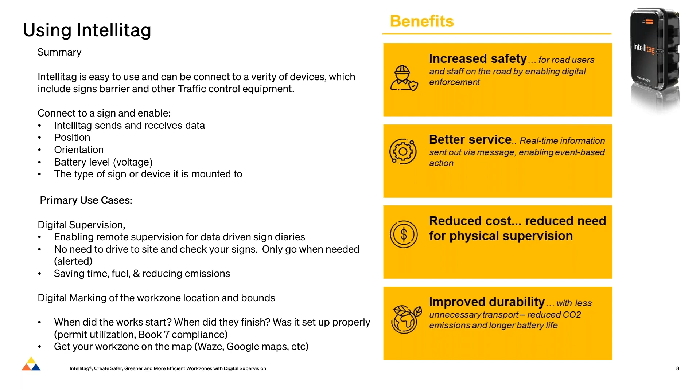How does Intellitag work? We install the Intellitag on a device via screw, bolt, or banding. Once it's attached to the device, we open the deployment app and scan the QR code on the back of the device. This gives us a menu showing how the device is doing, battery, expected life, and the last work zone it was on. Then we can pick what sign face we want to display on the Intellitag and what geozone or site we want to use.

Once we've done that, the sign will show up on the map. The whole process is designed to be easy and very quick.

Now that the device is set up, it'll appear on the map back on the web portal, and we can get alerts via SMS and email when the sign's been moved, knocked over, or even stolen.

How often does Intellitag check in? Depending on the site requirements, we can set the Intellitag to check in every 8 hours, 2 hours, once a day, twice a day, or once a week. This is set up beforehand, before we start the job. If the Intellitag is knocked over, moved, or hit by a vehicle, it will check in as well.

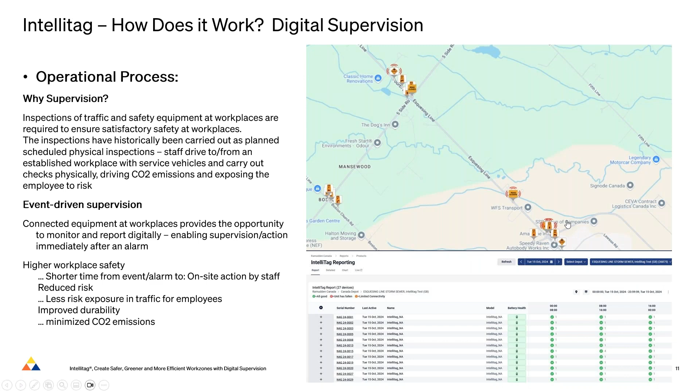Maybe we can speak a bit about how that works as far as SMS messaging and the workflow. Is it next? Yeah, that's the next slide. We've got a short video of a 3D render that shows us exactly how the notification process works.

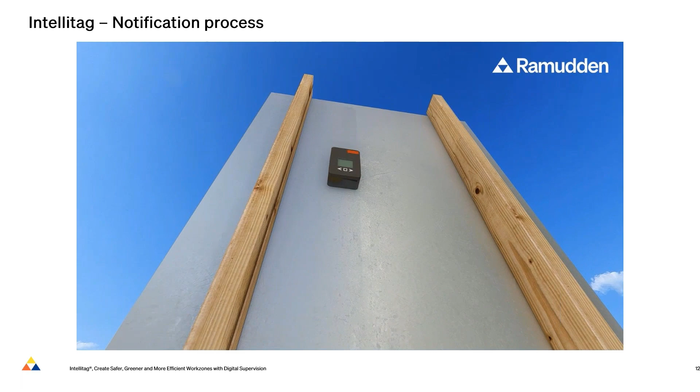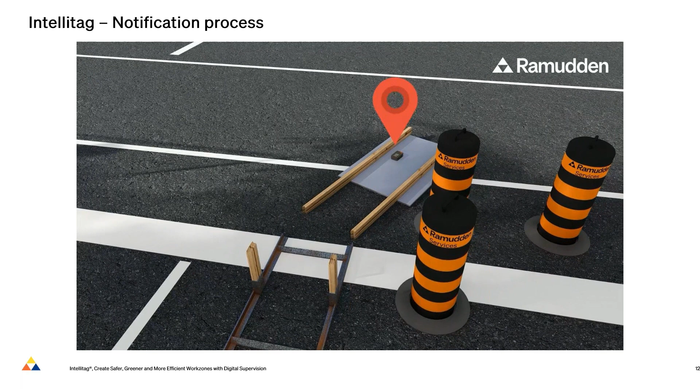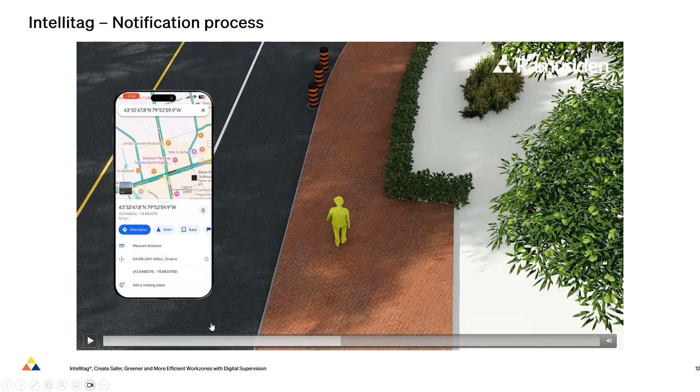As we said before, the Intellitag is fixed to the back of a sign, whether by banding, bolt, or strap. When a vehicle, a member of the public, or a site vehicle knocks a sign down, we get an alert—the Intellitag talks to the cloud, and we receive an alert via text message or email. When the text message comes through, it provides the operative or maintenance crew with a Google Maps link, taking them directly to the affected sign via a navigation app, so they can get there quickly and rectify the sign that's been knocked over.

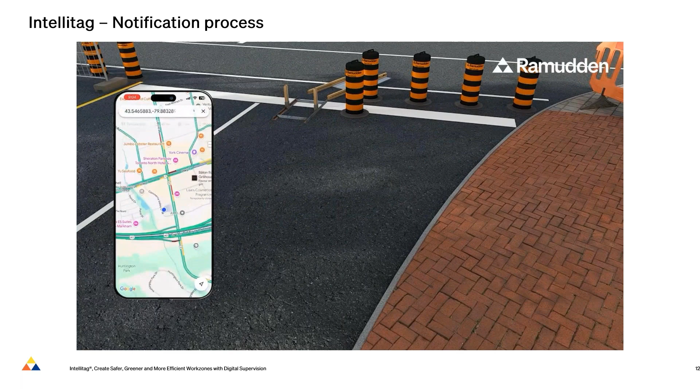Walk very casually. Or walk very casually, yeah. It's a bit of a, that guy's taking his time.

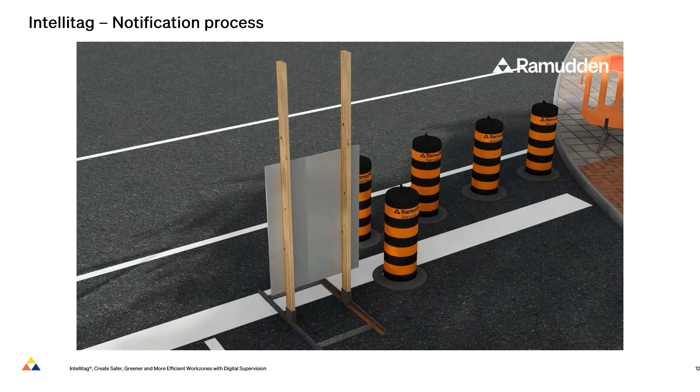Once this is installed, the software tracks the start, stop time, on and off time, and can provide reporting for signs installed, signs taken away, etc.

One of the key use cases with that is to know when the job was set up. Often there's, especially on highways with MTO, very strict limitations on when you're allowed to close the roadway. And sometimes that can be pushed a little bit too early, or they can stay on the road a little bit too late. So it's a really great tool for enforcement to ensure you know exactly when the lane was closed and that it stayed in compliance with those time bounds. That's one of the key use cases for the digital marking, to know where it is, but also when it was set up and when it was torn down.

So what's next for Intellitag? One of the other key use cases for digital marking is what we like to call generally connected work zone. And a big part of that is getting it onto the map. Generally that means Waze, but it also means in-car infotainment systems and even Google Maps, Apple Maps, and some others. That's been a big focus of ours for this use case.